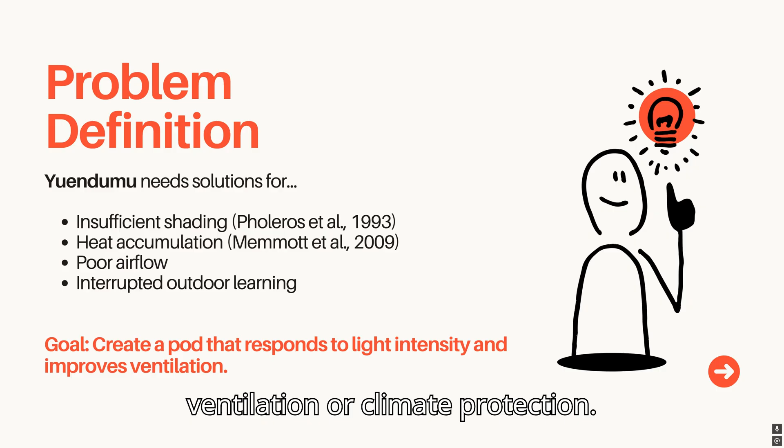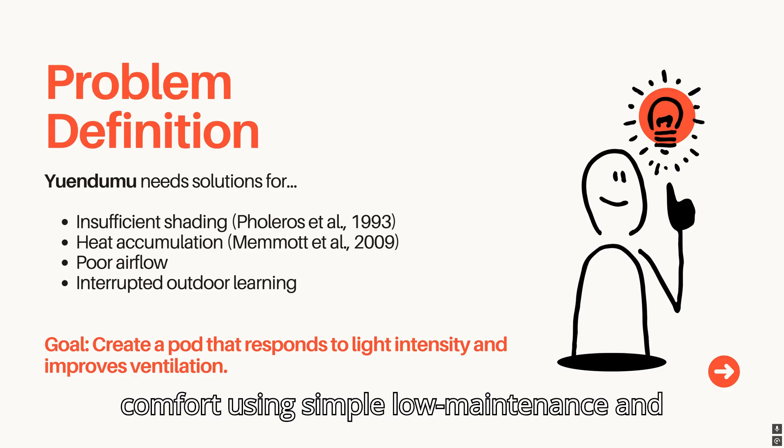My aim was to design a small-scale learning hub that improves comfort using simple, low-maintenance, and climate-responsive strategies.

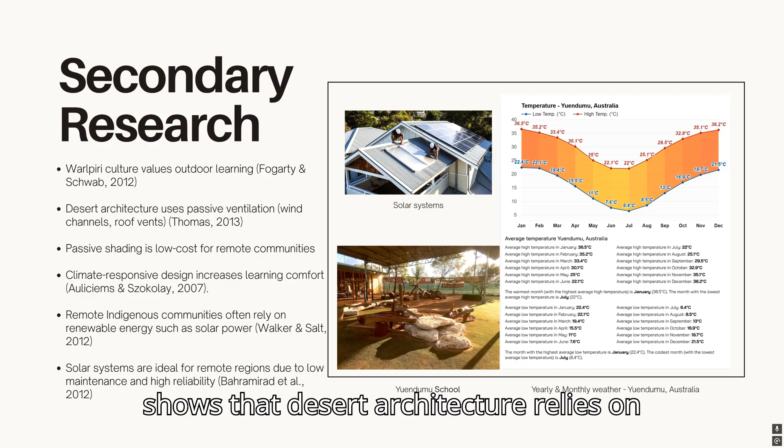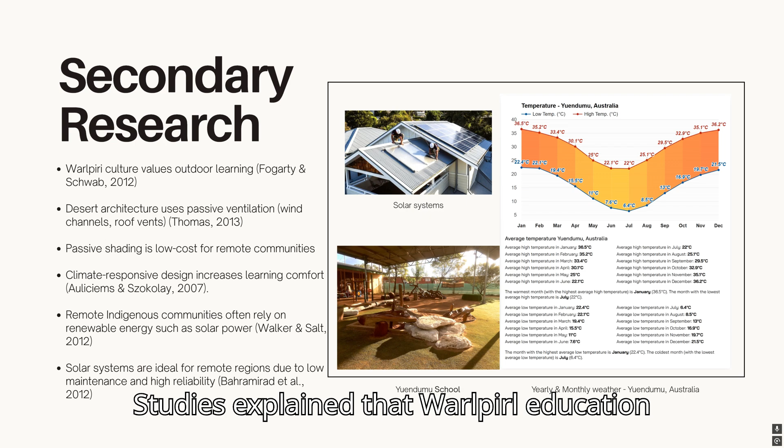Then it's about my research insights, first my secondary research, which highlighted two key insights. First, climate research shows that desert architecture relies on passive design, shading, roof ventilation, and natural airflow to reduce heat. Then, indigenous learning studies explain that Warlpiri education is relational, mobile, and connected to country. Learners need open, flexible spaces rather than enclosed rooms.

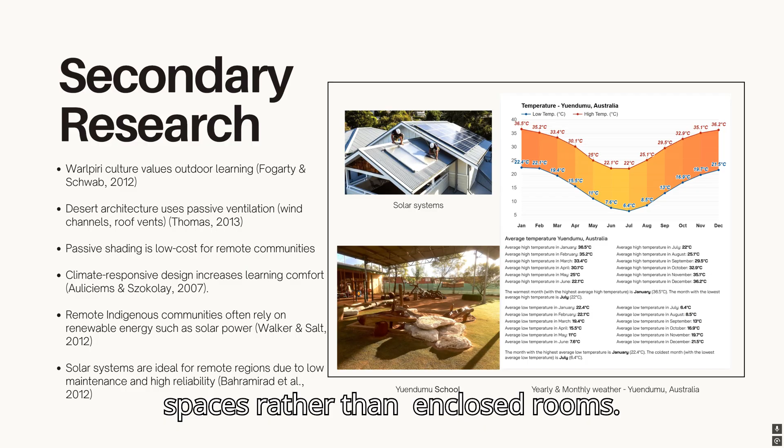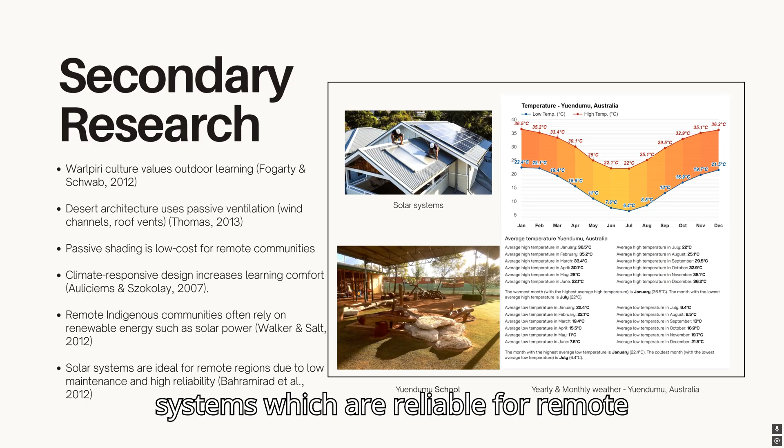This insight guided my project. The hub needed to use natural environmental processes while supporting culturally preferred outdoor learning. I also reviewed research on solar energy systems, which are reliable for remote communities with limited infrastructure. This led me to integrate a small solar panel into the prototype.

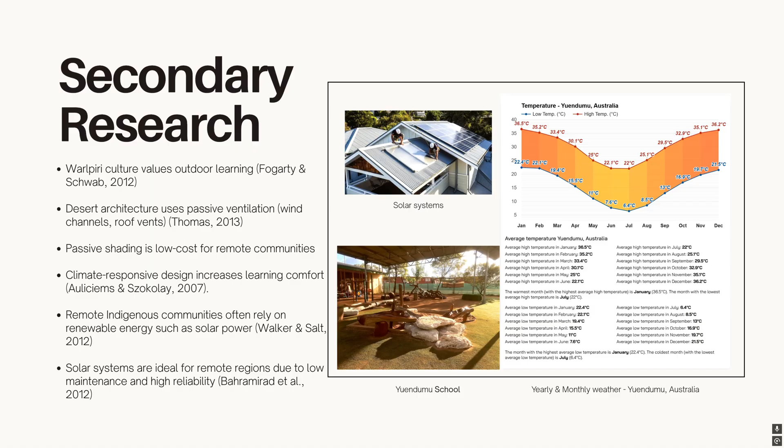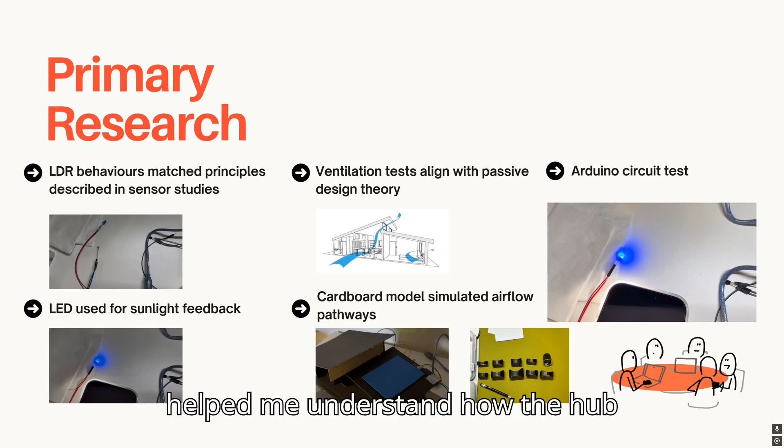Then it's about my primary research, which focused on two main areas. First, testing the LDR light sensor. I used an Arduino LDR and a 10,000 ohm resistor to observe how the sensor responded to different light levels. This test helped me understand how the hub could detect strong sunlight and provide a simple feedback signal using an LED.

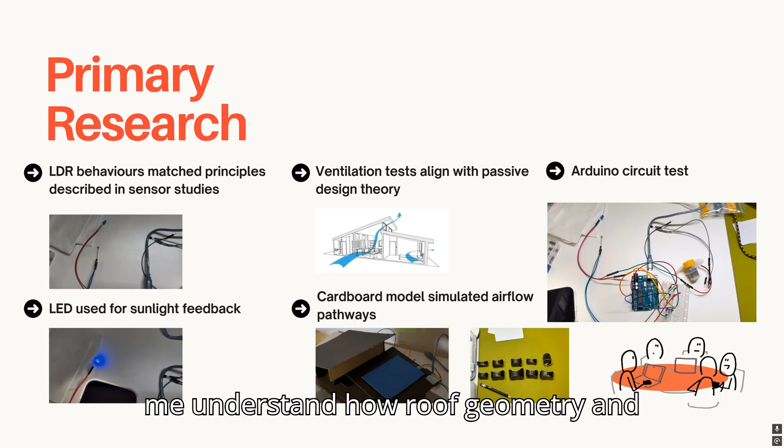Then it's about exploring spatial form and shading. I built cardboard models to study roof angles, opening size, shading performance, and the relationship between height and exposure. These models allowed me to visually analyze how the structure could reduce glare and guide airflow without mechanical cooling. Even though I did not run airflow experiments, the spatial modeling helped me understand how roof geometry and openings could naturally support ventilation.

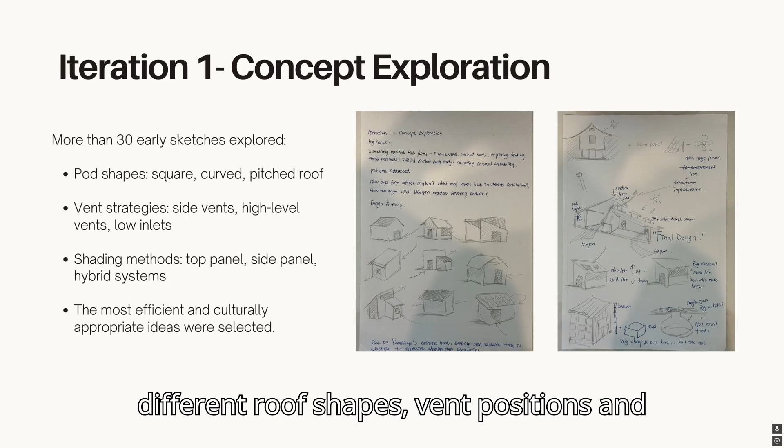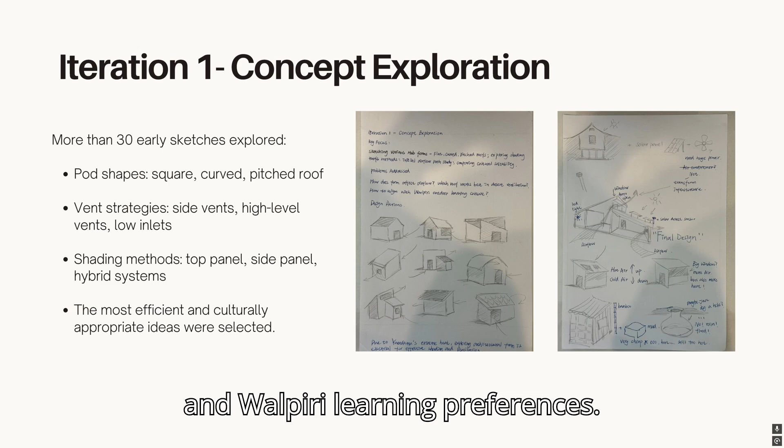Then it's about my iteration process. My iteration 1 focused on conceptual exploration. I produced over 30 sketches exploring different roof shapes, vent positions, and shading systems. These early drawings helped me identify which forms were most suitable for desert conditions and Warlpiri learning preferences.

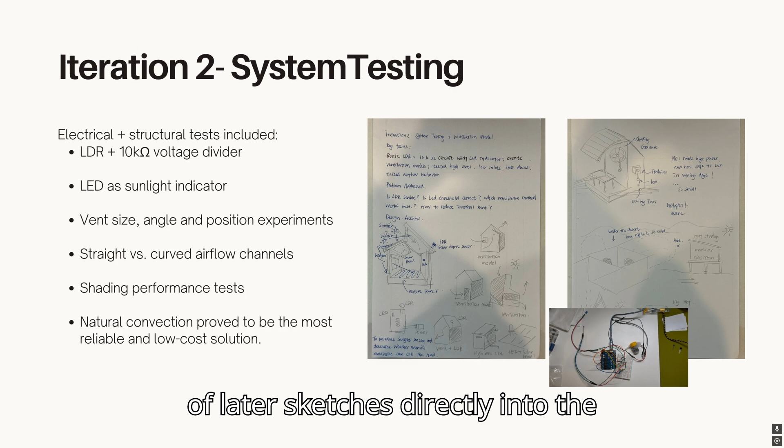My iteration 2 integrated electronics and structure. I tested the LDR LED system, explored vent angles, and added a roof-mounted solar panel. This iteration confirmed that a passive system supported by minimal electronics was the most reliable and culturally appropriate choice. I combined the ideas of later sketches directly into the final prototype, keeping the system simple and maintainable.

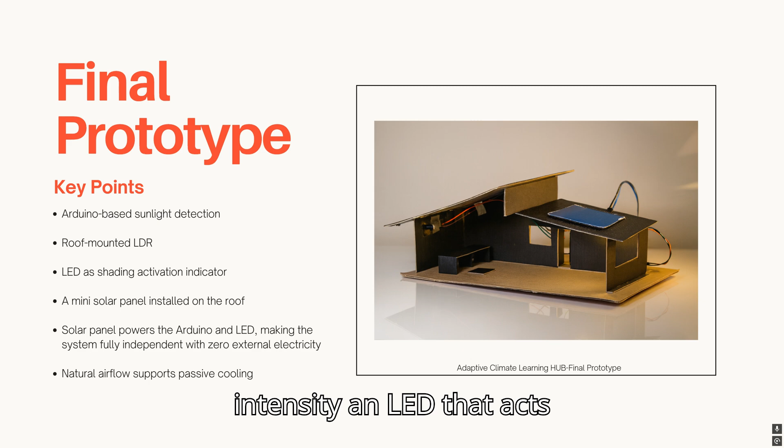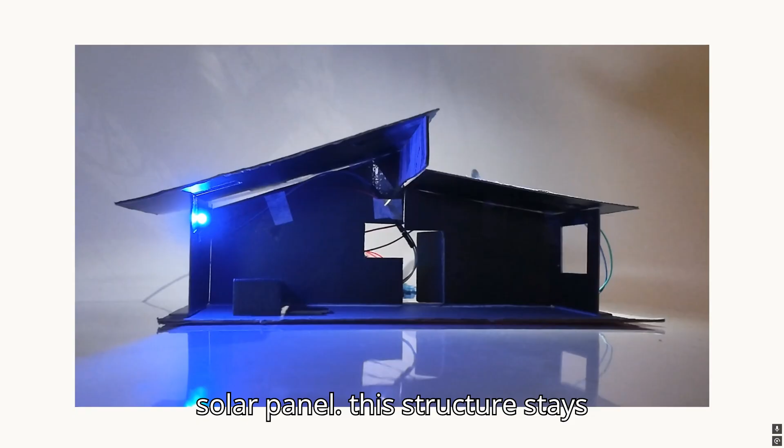And this is my final prototype. As shown on page 8 of my PowerPoint, the final hub includes a pitched roof that channels heat upward, and high and low openings that support natural ventilation, and a solar powered LDR that detects sunlight intensity, and an LED that acts as a subtle indicator for strong sunlight, and a fully off-grid electrical system powered by a mini solar panel. This structure stays open and breathable, aligning with Warlpiri learning culture while improving comfort in extreme weather.

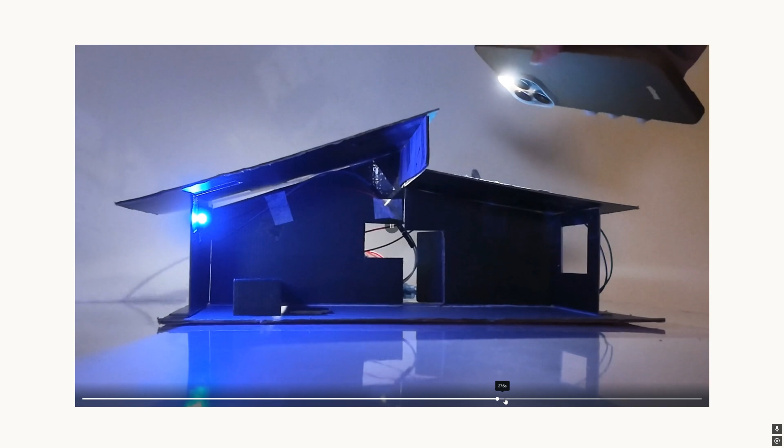Then it's about my community impact. First, it improves outdoor learning comfort and supports indigenous learning preferences and cultural practice, and increases participation and focus. It's low cost, maintainable, and suitable for remote communities, climate responsive and environmentally sustainable. Solar power enhances sustainability and local adaptation.

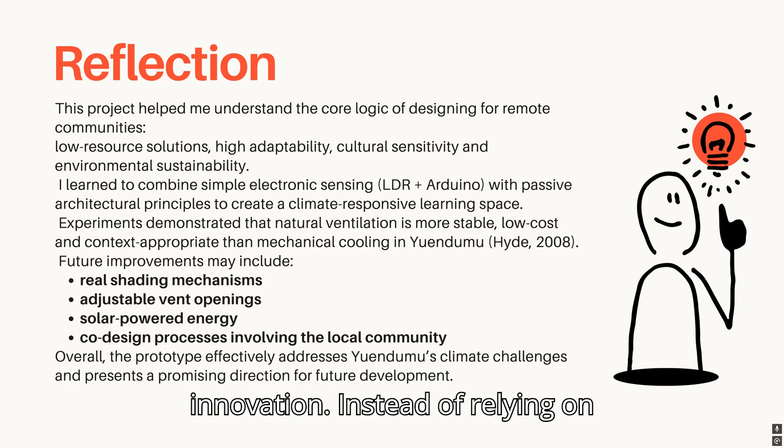Finally, about my reflection. Through this project, I learned that effective design in remote communities must balance environmental logic, cultural appropriateness, and low-tech innovation. Instead of relying on mechanical systems, I focused on natural processes, shade, airflow, and solar energy to create a learning space that is simple, respectful, and realistic.